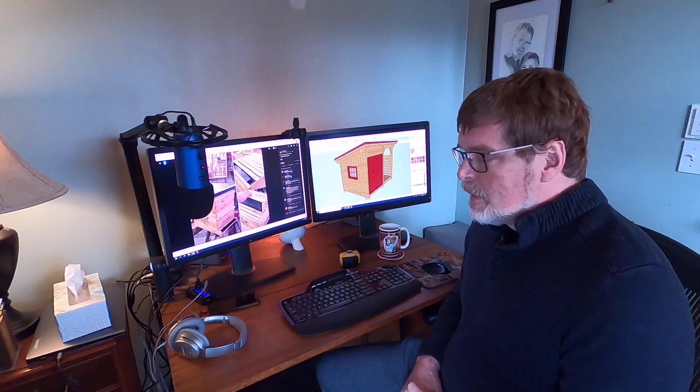So I've been a little quiet in the video production department lately. I think I suffered a certain amount of creative exhaustion at the end of the sauna build project. Also, I've been a little focused over the last couple of months as I'm in the process of retiring from my day job. So the good news is I should get more productive in the video production department soon.

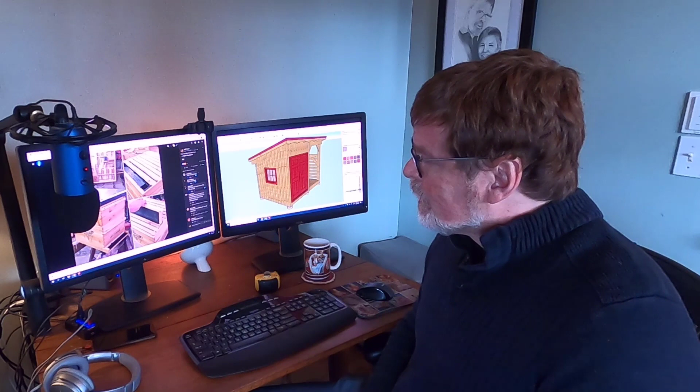I did help the kids make a series of beehives for the backyard, and I've just completed the design process for the next big project. So I thought I'd walk you through the design today.

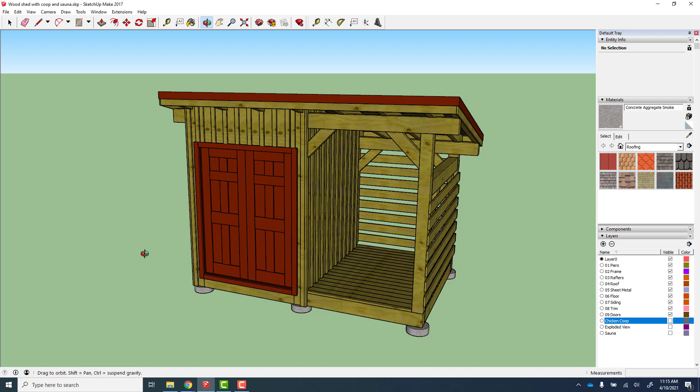So continuing with my current fascination with timber frame buildings, I've decided that the next project is going to be a timber frame garden shed slash woodshed. The woodshed part will obviously come in handy in supporting the wood burning timber frame sauna that was the last big project. Now, I'd like to walk you through how I built up the design here.

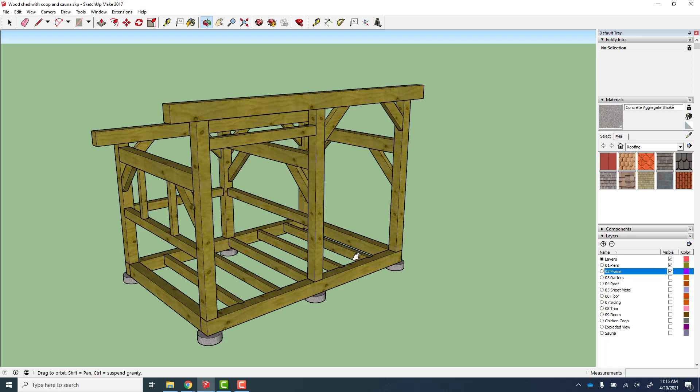So following along in the construction process, we'll start by putting down a series of 1 foot diameter concrete sonotubes, and then we will build the frame on top of that. To show you the level of detail I have in the frame model, I also have an exploded view here, so you can see that all of the components have their mortise and tenon joinery defined, and from there I'll make my drawings that we'll use to draw out all the timbers.

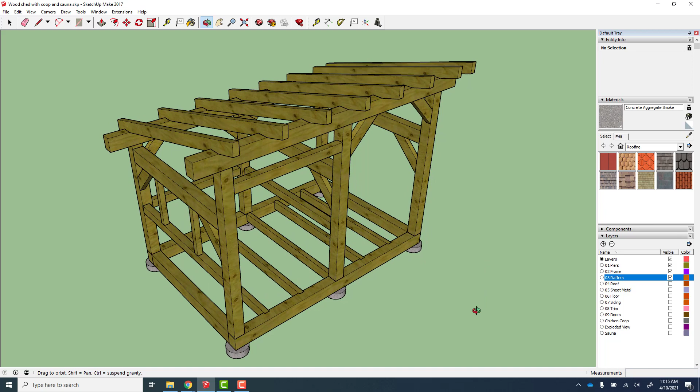Once we get the timber frame up, next come the rafters. And I see I've got one hidden there. Edit, unhide, all. And after that we build a roof. The roof will be made out of poplar lumber and then trimmed out. Like the sauna, we'll do a red sheet metal roof.

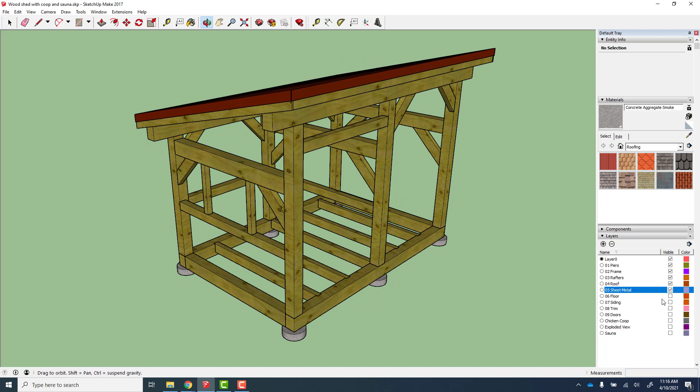Build a floor, also from poplar decking boards. Board and batten siding, again in poplar, just like the timber frame sauna. We'll trim it out and paint it that nice barn red that I have an affinity for. Build some doors, and actually these door models are just 2 doors, which are a copy of the sauna front door. I'm not sure I'll actually make them exactly that way.

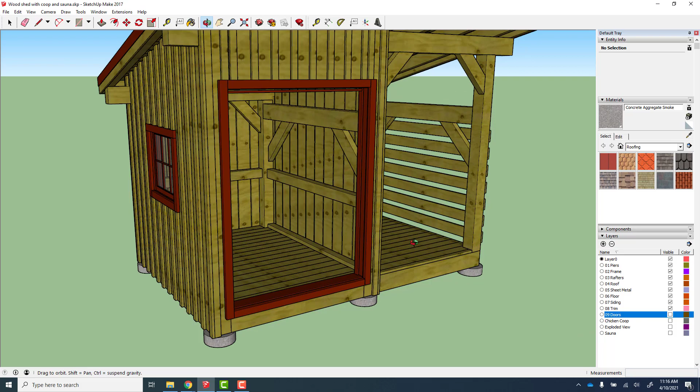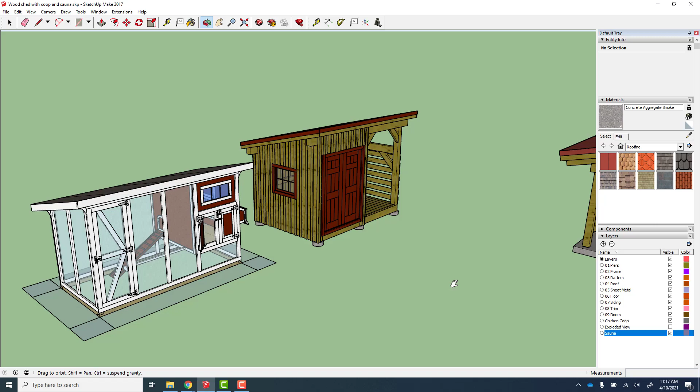So if you pull the doors off, you can see the garden shed will have all that nice timber framing inside. We think we will put the woodshed next to the chicken coop that I designed and built last year. And the shape and style of the building we think will nicely complement the sauna. The relative location isn't right here, but just to give you a sense of the size and scale of the timber frame sauna build versus the woodshed.

So that's the next big project, and I'll show you where it's going to go in the yard and give you a look at some of the materials we have on hand that we'll use to be building it. The shed will have a similar basic shape as the chicken coop. We actually think we'll put it right here beside where the chicken coop is, between the chicken coop and the barn. And when done, hopefully the color and styling of the woodshed will look similar to the timber frame sauna we built last summer.

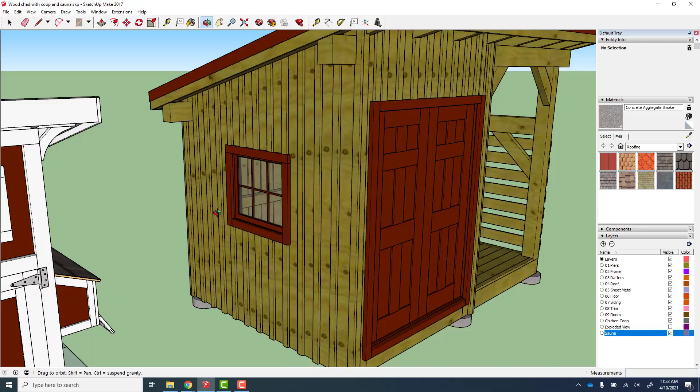Timbers we're going to use for the shed are stored here in the barn, along with some leftover metal roofing that we'll also use for the shed. And all of this is hybrid poplar that I cut from my friend's family farm in Ligonier, Pennsylvania. So just like we did for the chicken coop, for the window for the garden shed, we're going to reuse some old window sashes that came off the house when we replaced the windows. So that's the design of the next big project.